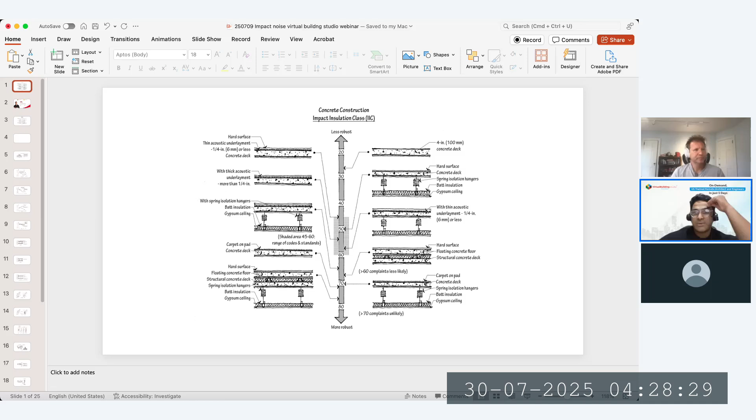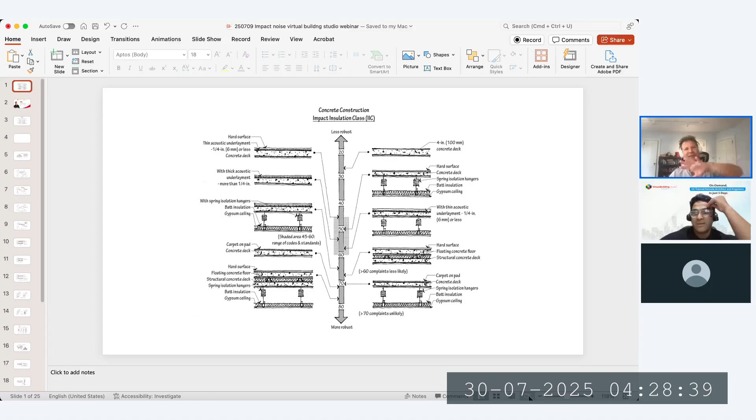So in the next 1 minute we can start. Okay great, and it's sufficiently large that people can see it, or is it just like a quarter of the screen? If you go on a slideshow, it's much better, it'll be a full screen. I was hoping not to, because I have 2 screens and it winds up messing things up here. Let's see. Yeah, that's less than ideal, but we can. No, it's perfect. Okay, it's perfect. So you can't see the slides on the bottom, you can only see the main page of the slides. Right, it's beautiful. Perfect, okay cool.

So in a minute. Okay, so we start now.

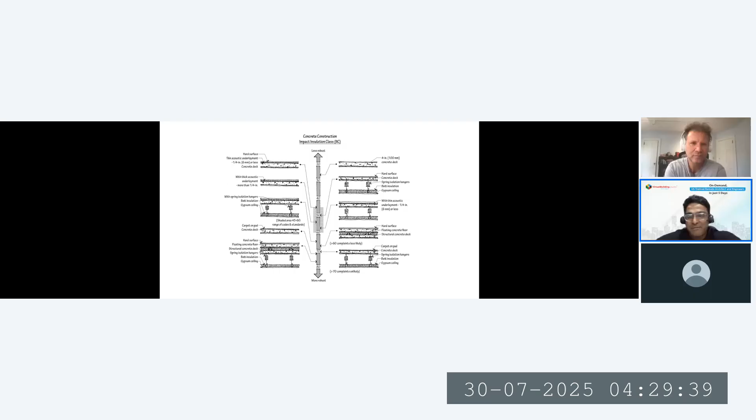Michael, back to you. Hey everybody. So impact noise is generally caused by, at first approximation, footfall. Of course it can be caused by any impulsive impact sound, so it could be a cabinet slamming, exercise activities like weightlifting, weights dropping, furniture moving, or pots dropping. But generally, when we're talking about impact noise, we're talking about footfall. And if you've ever lived in a place with someone walking above you, especially if you lived in stick construction, wood construction homes, like multifamily homes, although it could certainly be a hotel or a dorm, it's quite a good likelihood that you've heard the people upstairs.

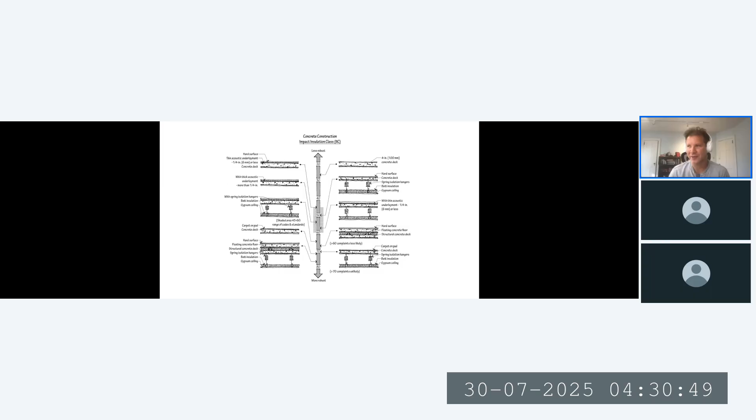And impact noise is really insidious, because it's probably the most difficult thing to address in acoustics, certainly the most difficult of the common things to address in architectural acoustics, for a couple of reasons. One is it doesn't have to be loud to annoy people. Many reasonably minded people are annoyed just by the audibility of someone upstairs. Now, how much they're annoyed may depend as much on who's upstairs as how much noise is actually measured. In other words, if it's your own kids or dog walking around upstairs, most people feel a little bit differently than if it's someone else's dog or kids upstairs.

And just by coincidence this month, I asked the internet where the term 'waiting for the other shoe to drop' came from, having no idea it had anything to do with impact noise, just out of curiosity because my wife said that phrase. It turns out it originated about 100 years ago in the tenements of New York City, which weren't built that well. When the person came home from work, they would take off one shoe, and then you would wait for them to take off the other shoe, or wait for the other shoe to drop. So it's actually an American expression, and much more recent than I would have thought. I kind of expected it to be from Shakespeare or some ancient proverb.

But the mere audibility of the noise from upstairs may be enough to make reasonably minded people dissatisfied. So that's one problem. The second problem is that it's super hard to fix after the fact, unlike most acoustic issues, which typically have sometimes an expensive or disruptive solution. The solution for this kind of thing, if you can hear the people upstairs and it's driving you crazy, is to move everyone out, rip everything up, and redo a bunch. That's really difficult because sometimes now the ceilings aren't high enough to meet code, since you've made the floor-ceiling assemblies thicker, and it's created a whole bunch of dust. It's very common to have lawsuits in this kind of space.

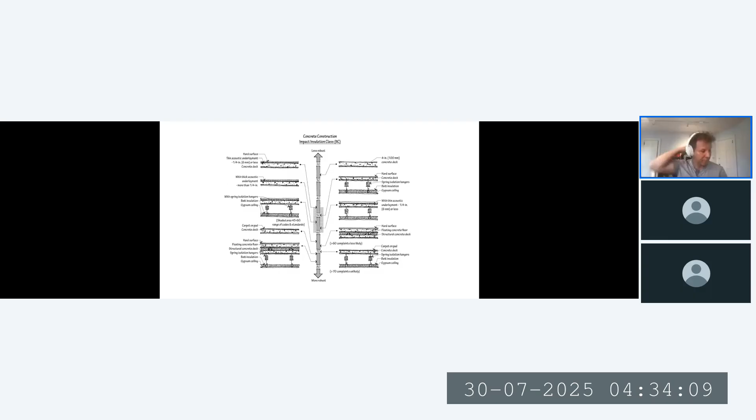The first reason is that mere audibility could drive someone crazy. The second reason is that condo boards sue because, especially now, a few things have happened. One is we're building out of stick construction, and as we're going to see, light wood construction is really problematic when it comes to impact noise.

Number two, people just don't use carpet as much as they used to. We're going to see that carpet is actually really effective at reducing impact noise, and people don't like carpet because, well, carpet sucks for all kinds of reasons.

And number three, it used to be poor people lived in cities and multifamily housing, and they didn't have the wherewithal to file lawsuits as readily as rich people, who often lived in the suburbs with their kids and are now retiring and moving to the city expecting city life and action, but really don't expect the kind of noise associated from someone walking above.

Because people go nuts, and because mere audibility can drive someone crazy, often what happens is, after the fact, if you try to fix it, reasonably minded people hear all the people walking above and it drives them crazy. And then you fix it—I say fix it in air quotes, because you can't make all the noise go away from someone walking around, especially a dog or a kid smashing down toys, without carpet anyway.

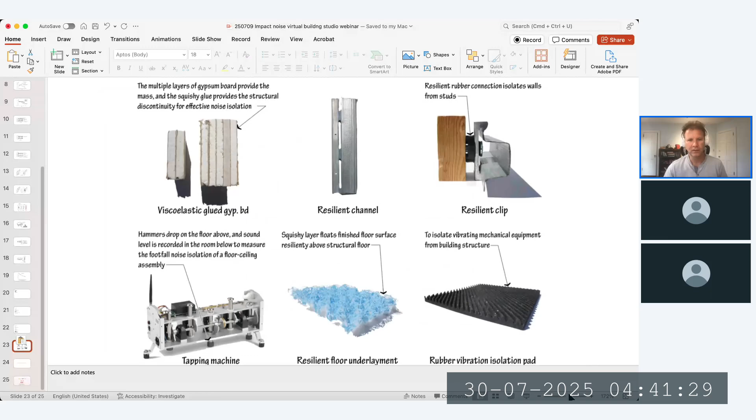But anyhow, the way we measure IIC is we have what's called a tapping machine. If we take it apart, the tapping machine I have behind me looks like this - down in the lower left-hand corner. So if I zoom in, it looks like this.

There are these little pistons that drop from, I think, an inch high, metal pistons that free fall drop twice a second, and there are 5 pistons. So 10 times per second you hear tap, tap, tap, tap, tap, tap, tap. What we're going to do is turn that machine on.

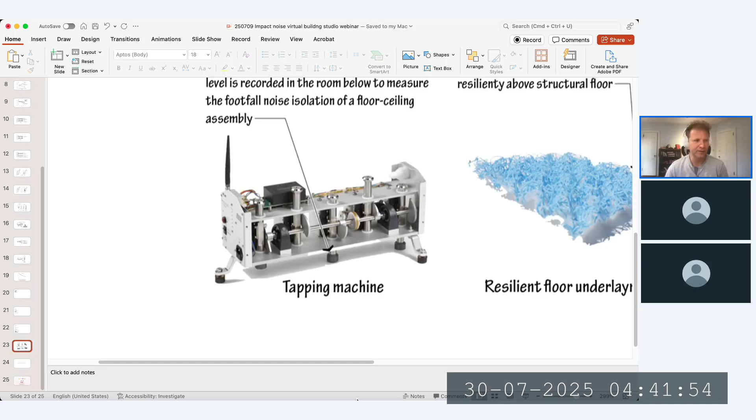I'll go ahead and turn it on now. Let me stop sharing so you can see what it looks like. I have it on the floor, so we'll see if I can show it to you. Believe it or not, I'm in my office, but my office looks like a house, and my house looks like an office, so that's weird. Let's see if I can bring it over. It's in screen, here it is. And I'm going to turn it on - it's going to get really loud.

Put in the Q&A if you heard that. I assume you did, so my microphones are all set up correctly.

So what you just heard is that tapping machine. To measure the IIC, we run the tapping machine in the apartment upstairs, then take microphones in the apartment downstairs, and essentially measure how loud it is at different frequencies. We do a bunch of things in post-processing that aren't very complex but are kind of complicated, and certainly not worth exploring now, but we come up with a single number. Like so often happens in acoustics, a single number is very useful for comparing different floor ceiling assemblies, or seeing if we've achieved some minimum performance. It's very useful, but not particularly accurate.

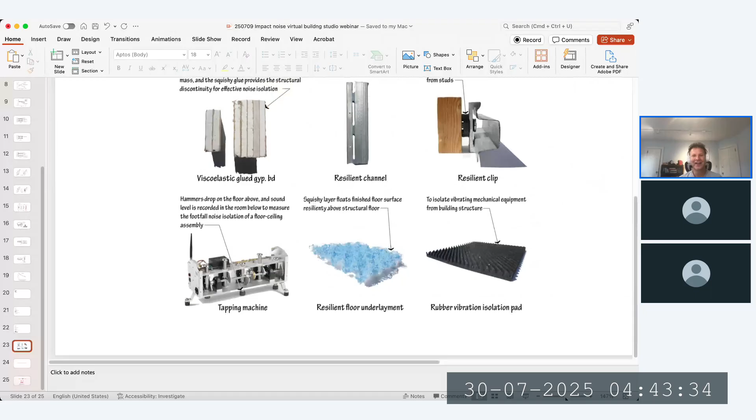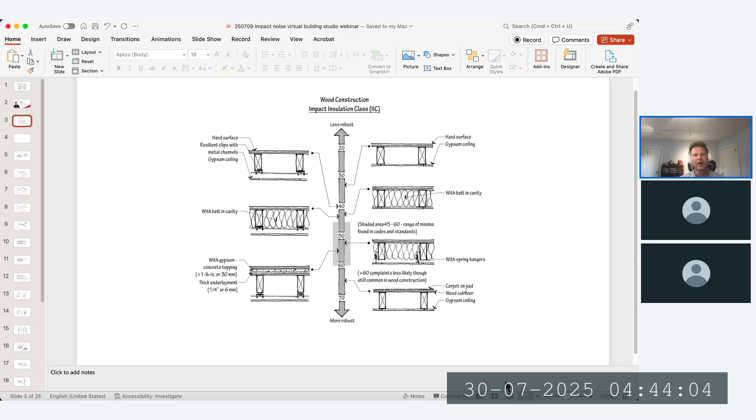So IIC is the best we have. It's widely accepted. Now it doesn't work for several reasons, and it's not great for several reasons. It works, we've managed to live with it for 75 years, but it's not great.

The first and most important reason is it really doesn't do well for wood construction, in part because when it was created, we weren't making a lot of multifamily housing out of light wood stick construction. It was made more for dealing with the clack clack of high heels from the 50s walking around on a concrete floor than for a heavier person walking around on a deflecting wood floor. Wood in particular, because of the deflection issue and the stiffness issue, it's usually not stiff enough to perform super well under the weight of a person.

So that clacking, and the way we post-process it, especially really doesn't account for the wood. So it's actually quite possible to have a pretty robust IIC rating in a stick constructed building, and reasonable people can still be really, really annoyed by the people walking above, even though the IIC is a high number.

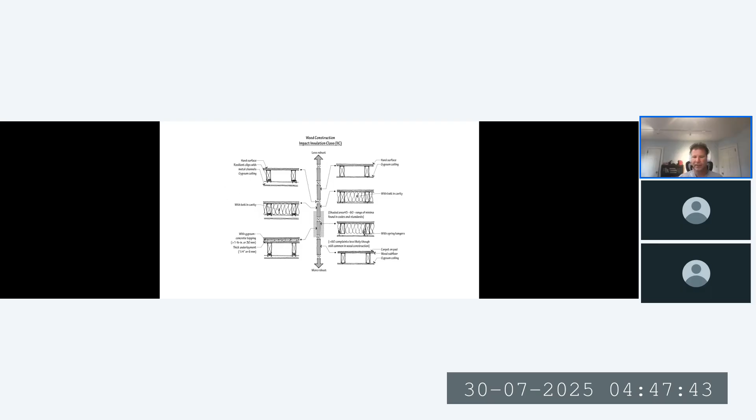And to achieve a good IIC, there are probably two things you should focus on. Let's see if I can draw it. I have an iPad to draw it on, but we can't connect to the system.

So I'm going to go ahead and see if I can draw it here with a mouse, so forgive the drawing. So if this is a section through our floor ceiling assembly, let's say this is wood construction.

What we're going to do is have a floor, whether that's vinyl, or well, if it's carpet, then we're pretty much set. Like carpet, if you have carpet, you're pretty much set. It's very, or cork, or rubber. By far the best way to address this issue is just put carpet on the thing, and you're fine, because you're dampening the impact noise before it's even made.

The problem with carpet, besides the fact that carpet sucks, is that someone may rip out the carpet eventually. So even if you put carpet in now, later on that may wind up being tile or hardwood floor or vinyl.

And so I think we probably ought to plan for it not being carpet one day, even if it is. But carpet's the way to go if you only cared about impact noise and didn't care about allergies, dirt, off-gassing, or aesthetics.

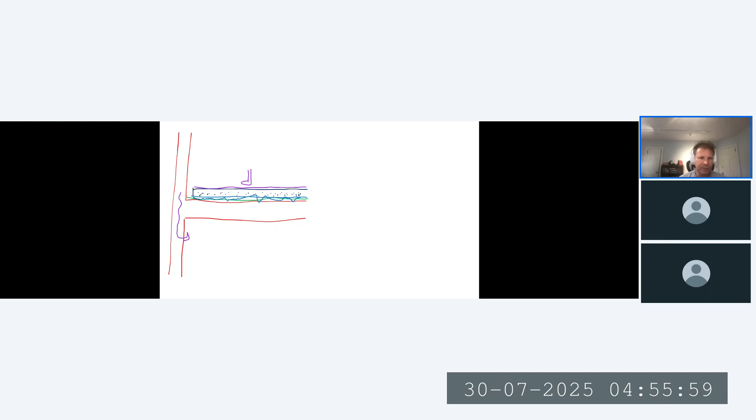So what we're going to do is take the manufacturer of the underlayment, that kind of squishy pad—they're also going to provide, or you'll be able to buy, what's called a perimeter board. It's essentially a squishy board that goes in here, and that squishiness isolates the footfall from the structure.

And then likewise, we're going to put our molding here, and we're going to attach it to the wall, not the floor. And we're going to use caulk everywhere, right? There'll be just all this caulk in places, and we're talking about non-hardening caulk, so that we're essentially isolating and floating the floor above the structure.

And then underneath the structure, in this case the joists are going right to left, so perpendicular to that we're going to take what's called resilient channel, which is a floppy metal thing that runs between the joists. What we're going to do is support the gypsum board—or better yet, two layers of gypsum board—on that metal channel. That's called resilient channel, or resilient clips, or spring hangers. That's essentially going to make the ceiling also springy.

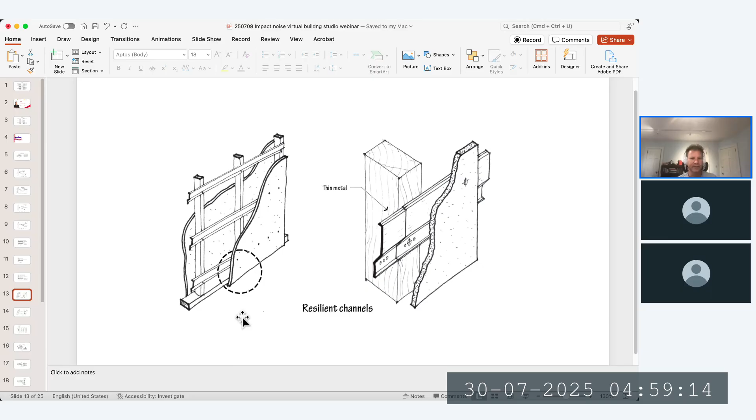And in real life, non-drawing world, it looks like this, and that's going to go across. Now there's another option, which is called a resilient clip, and this is one. So you see, you'd have the joist, and then you have this kind of rubberized element, and that isolates the joist from—actually you'd probably turn it like this, right? No, you'd have it like this. And then the hat channel, you put hat channel, and it just clips in.

It's pretty effective—it'll add maybe 5, 6, 7. All these techniques add 5, 6, 7 or more IIC to it, but it varies significantly from assembly to assembly. And so then you can suspend the drywall, you can attach the drywall to this. So you're attaching the floppy thing to the stud, and then attaching the gypsum board to the floppy thing. So that's what this looks like.

It's not to be confused with normal hat channel. Normal hat channel really doesn't work because it's just not floppy, it's too rigid. So if you have normal hat channel, which contractors love to use because they use it all the time and it's less expensive than those proprietary clips, they'll say, oh, we can just use this—but it's too rigid, especially when it's pinched in. It doesn't act as a structural discontinuity in the same way that resilient channel would.

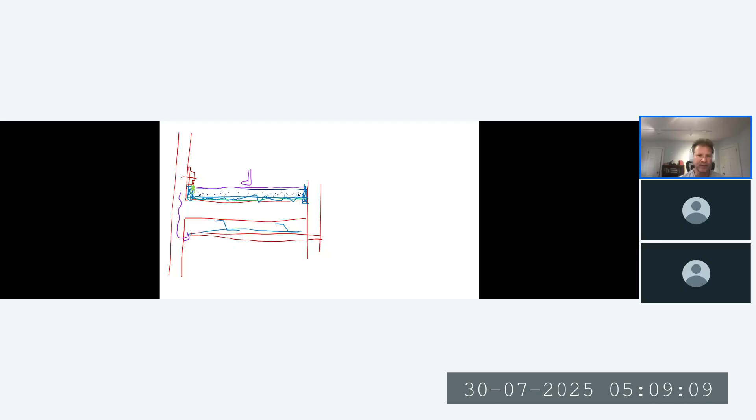Now, likewise, if we have ducts or pipes that are going to penetrate through the floor, we're going to again want to take the squishy stuff, the perimeter board, and put it here, or some kind of squishy material, with lots of caulk around the top, and the same down here, a little caulk, so that the pipe can penetrate through. And again, we're less likely to have flanking paths going through the pipe or through the duct.

So basically, there's not really one detail I can give you that explains everything. You just have to be smart about it and ask, where is the footfall, and is it touching anything connecting the floor above with the floor below? If not, you've addressed flanking paths. But if it is - like if you put a really long nail in there - that's a flanking path. It's short-circuiting the efforts we've made to separate these.

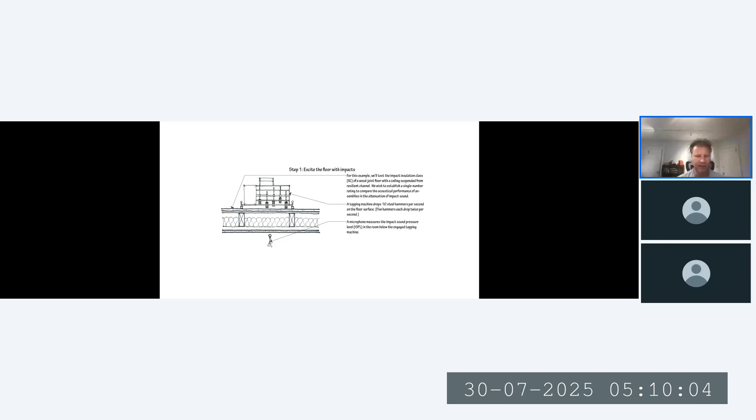So we're going to excite it with impacts and come up with an IIC number. And remember, I said we really can't do it without concrete. It's funny, in preparation for this talk I went and read my chapter on this topic in my book, and I said basically that anyone who's not an idiot and knows about this stuff knows that if you have wood construction and want to achieve something good, you need to pour concrete or some kind of cementitious product down.

But since then, I've gotten to thinking, and I've started a company - I'm getting you the link, hold on - because we think that if we have total control over the floor-ceiling assembly... remember I said it's very unpredictable because you might not be using exactly the right gypsum board or thickness of subfloor, or the exact combination of this particular underlayment and this particular spring hanger for the ceiling with this particular thickness of vinyl. So it's just too open-ended.

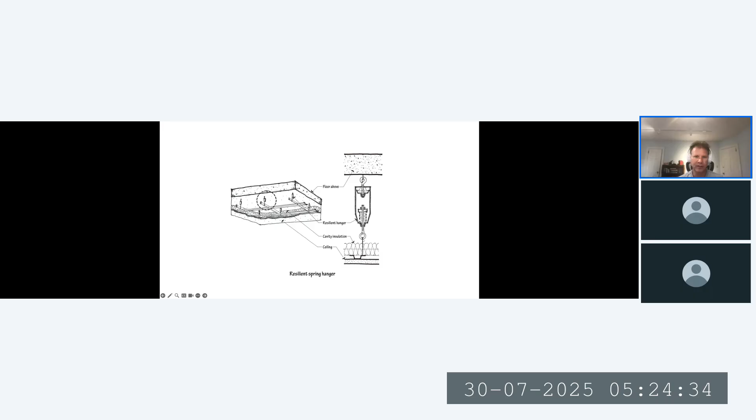And then I didn't draw this, but the wall on the floor, let me go back and just draw it actually. For reasons that will become obvious.

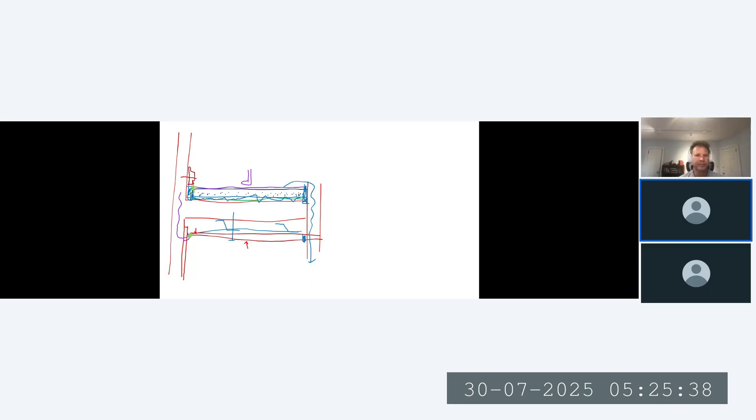Someone asked, in a floor ceiling assembly, could the use of thick cushion materials for noise reduction lead to leveling issues over time due to material compression or settling? That is a great question. Whoever asked that, I think that's Rajat.

You're really, really smart. That's something I don't understand either. Basically, these materials have been tested over time. If I was making new material, which I kind of am, that's something I'm really frightened of. So we're going to be using existing, long proven materials. It's kind of the assembly of them, the control of them, and the vetting of them that we're offering in our proposal.

Yes, and that's why actually at one point I had thought about you, because these underlayments are super expensive. And I had thought about using carpet pad, because certainly carpet pad's been around a long time, and we know its fire code limitations and achievements. So I was thinking about doing carpet pad, but that was part of the issue - over time it's just not level enough.

Now, what happens if there's no concrete? If there's an underlayment but no concrete topping, we have the subfloor, then the underlayment, and then basically a second subfloor. If we don't have the concrete topping on top, we have usually two more layers of OSB. So we essentially have a wood floating floor on top of the underlayment.